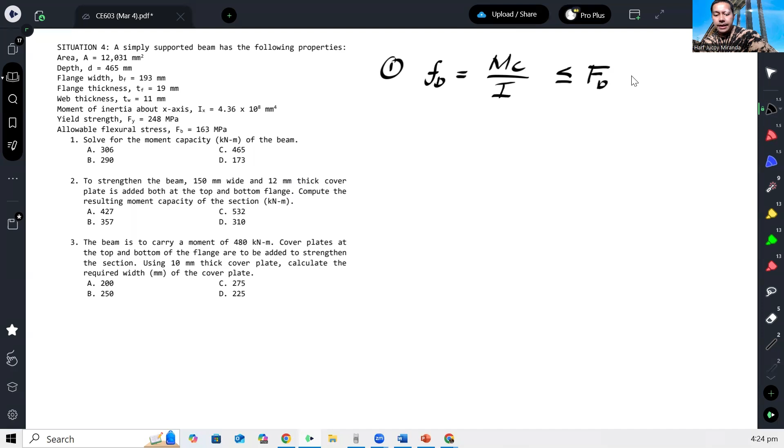Everything is given. So number 1, solve for the moment capacity of the beam - that's all we're looking for. This is easy to solve. The actual bending stress is MC over I, which should not exceed the allowable of 163. So that's what we're solving for - the moment capacity.

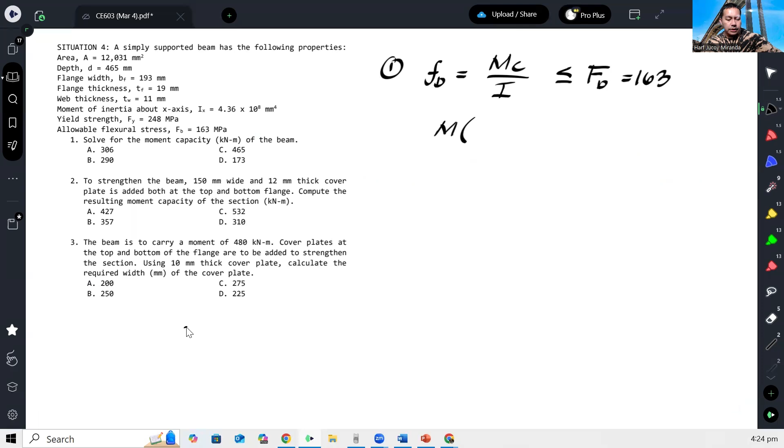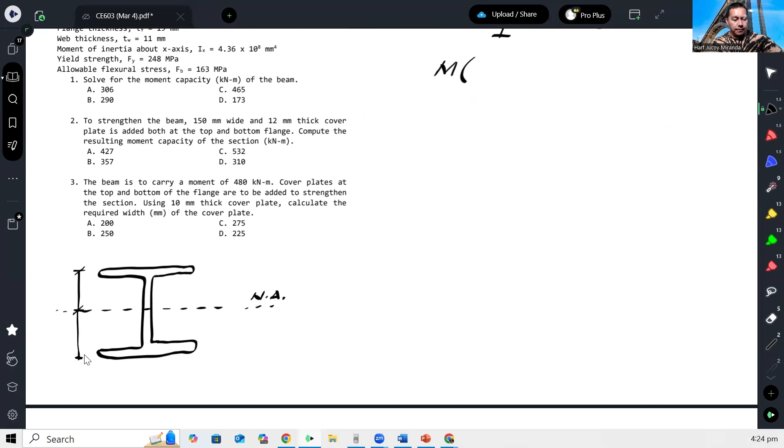So we have M, what is our C? Since this is a wide flange, here's the shape of the wide flange, and the neutral axis is here at X. So that means our C is this, or this at the bottom - which is just half of the overall depth. Our overall depth is 465.

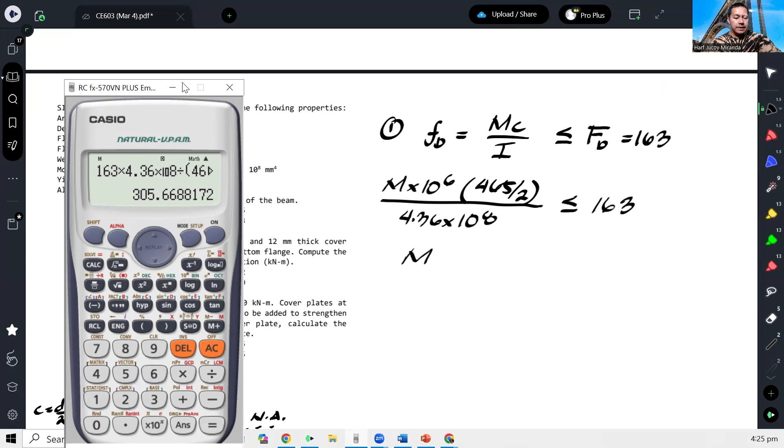So it should not exceed 163, and from that we can get the maximum moment capacity. So we have 163 times 4.36 times 10 to the 8, over 465 divided by 2, times 10 to the 6. That gives us 305.67.

So in the choices, the closest answer would be letter A.

Next, number 2: To strengthen the beam, a 150 mm wide and 12 mm thick cover plate is added both at the top and the bottom flange. Compute the resulting moment capacity of this section.

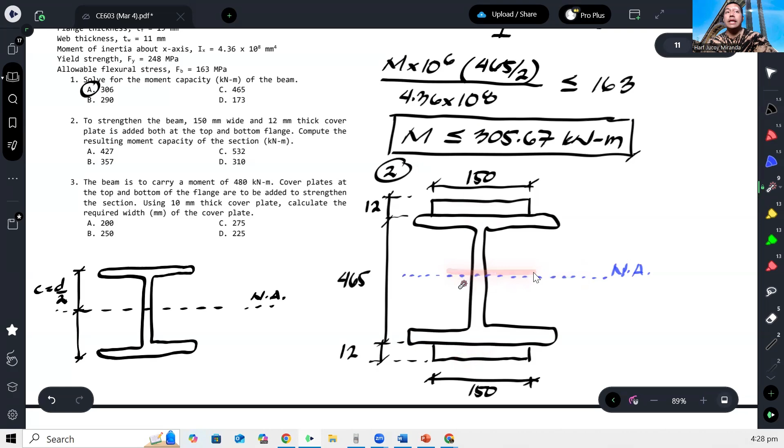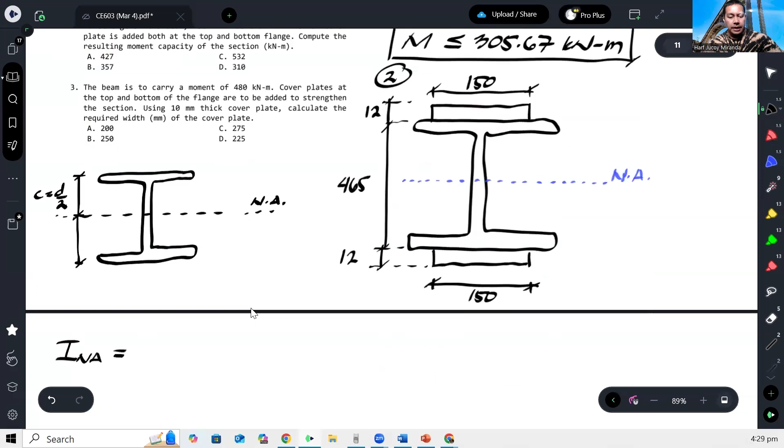So our new moment of inertia for number 2 - let's start with the wide flange. The moment of inertia of the wide flange is 4.36 times 10 to the 8. Since the centroid of the wide flange coincides with the new centroid, we don't need the transfer formula - no plus A d squared.

Next, for the cover plates, since it's a rectangle, we use B H cubed over 12. And since its centroid has a distance from the global centroid, we need to add A d squared or A y squared. So what is that distance? It's 465 over 2 plus 12 over 2.

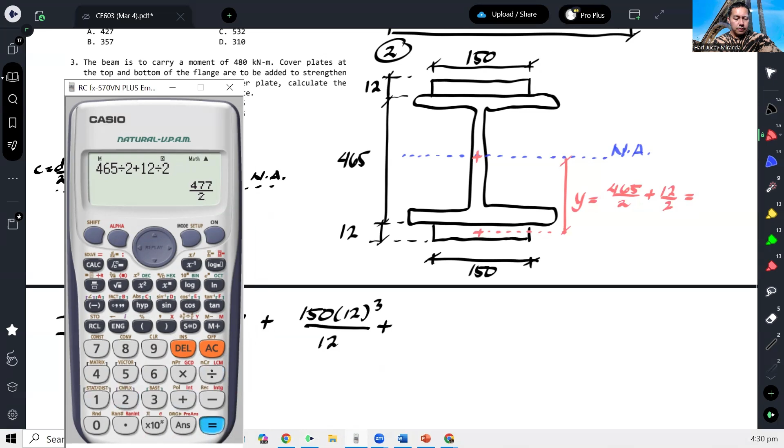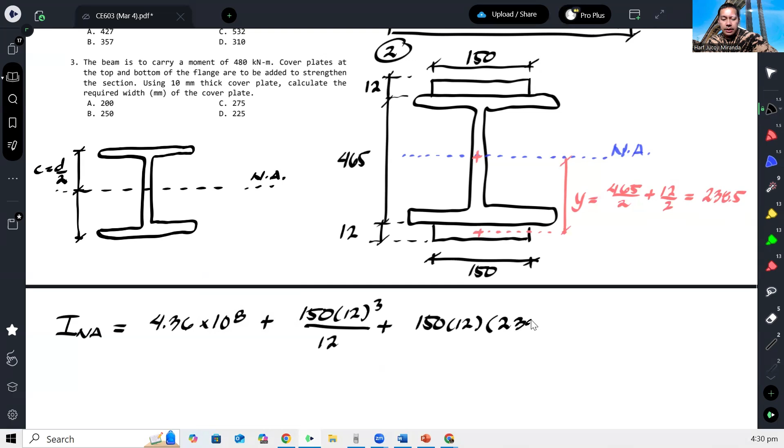And that gives us 238.5. So therefore, the area of the cover plate is 150 by 12 times the distance, 238.5 squared. That is only for the bottom. But take note, you have the bottom and also the top, so we need to multiply this by 2. And that will calculate our new moment of inertia about the neutral axis.

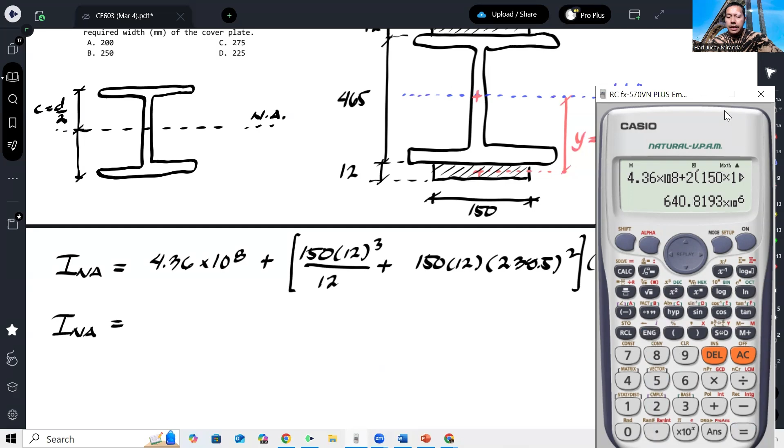So that is 640.819. Okay, so now we can calculate our new moment capacity.

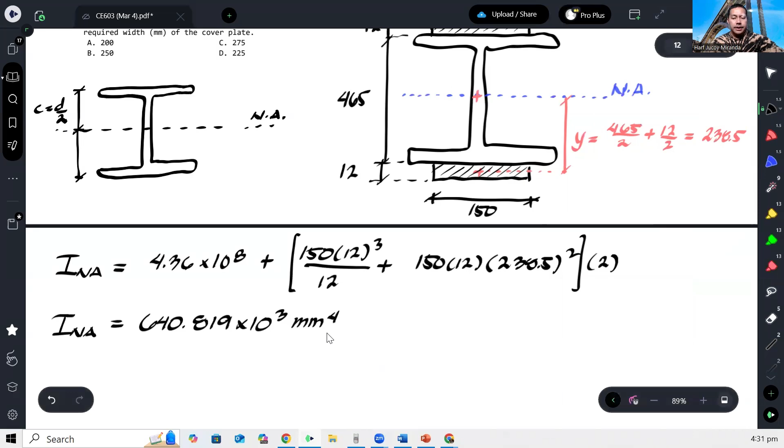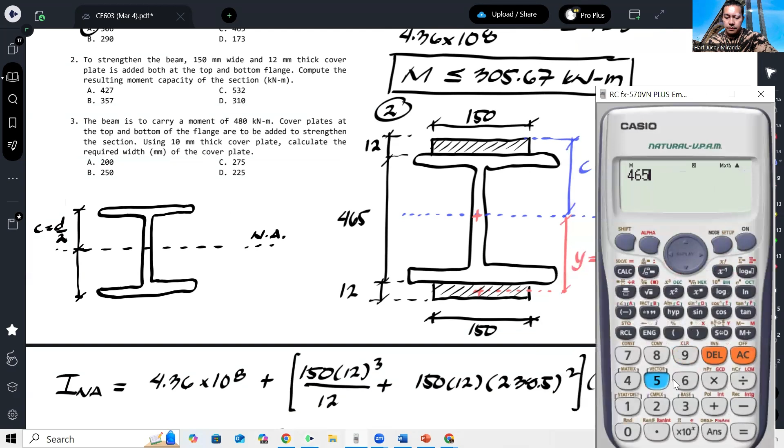Let's repeat number 1. MC over I should be at least, or should not exceed, the allowable of 163. And that gives us M. Our C, here it is, up to the outermost point. And that is 465 over 2 plus 12, giving 244.5.

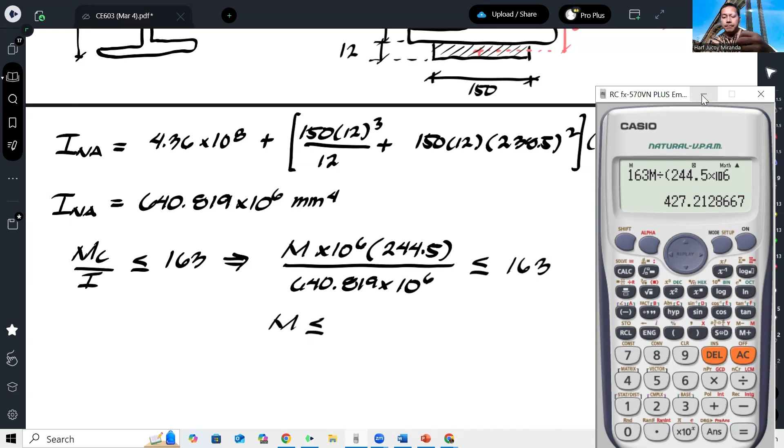This is times 10 to the 6, over I, which we already have. And from there, we can calculate the maximum moment capacity. So that gives us 427.21. So that will be the moment capacity, approximately letter A.

And then number 3: the beam is to carry a moment of 480 kilonewton meter. Cover plates at the top and the bottom of the flange are to be added to strengthen the section. Using a 10 mm thick cover plate, calculate the required width of the cover plate. So now, we're being asked what should be the width, so that it can carry this 480 kilonewton meter.

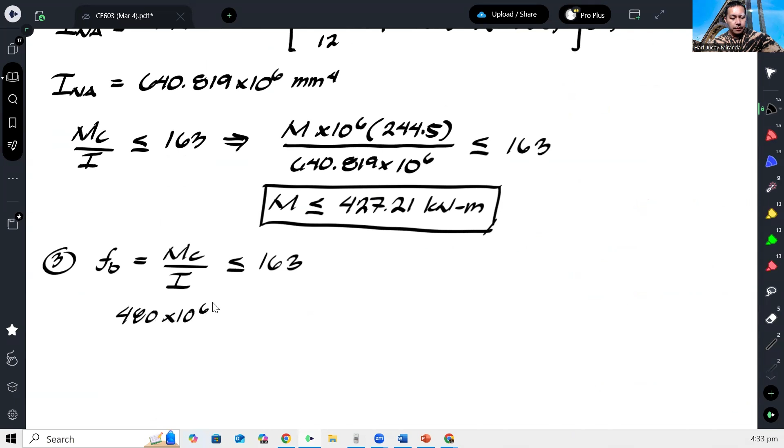So for number 3, this is how it goes: our bending stress, MC over I, we compare again to the allowable of 163. There's a given moment of 480 kilonewton. Then our C, okay, this is how it happens — this is the wide flange. So this is actually similar to number 2, and we have here the cover plate, top and bottom.

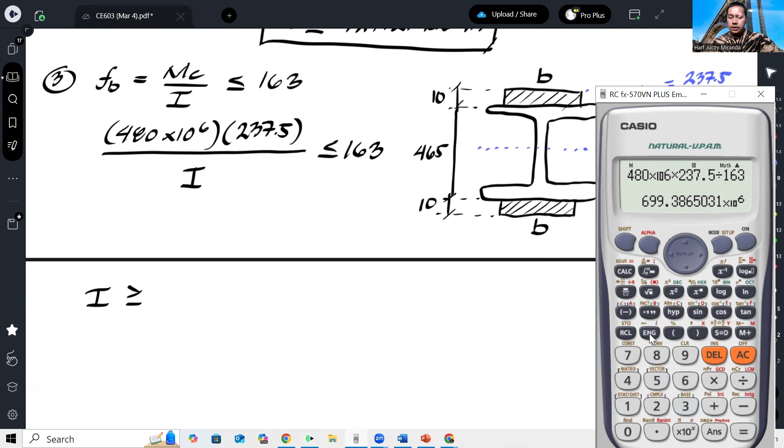It should be at least 699.387 times 10 to the 6 millimeter to the fourth. And how do I compute for that moment of inertia? We can compute for that using what we did earlier — it's basically the same.

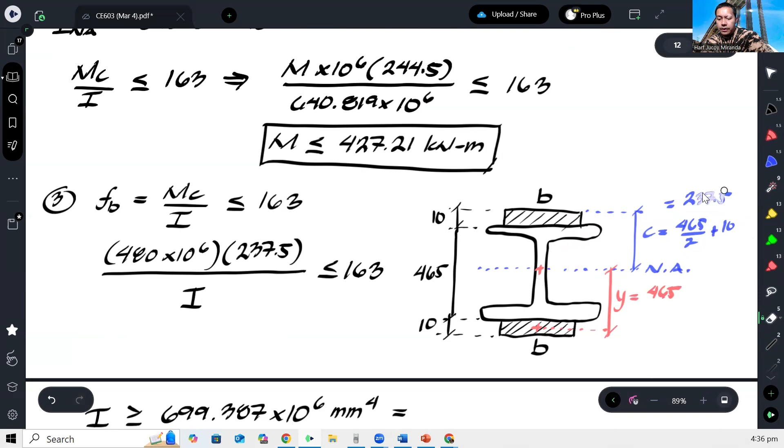So this has an issue here — it should be 242.5. So this will change the value... it should be 714.11.

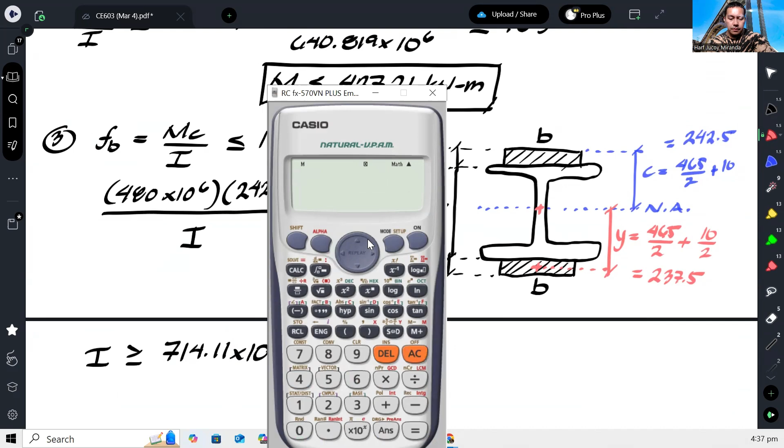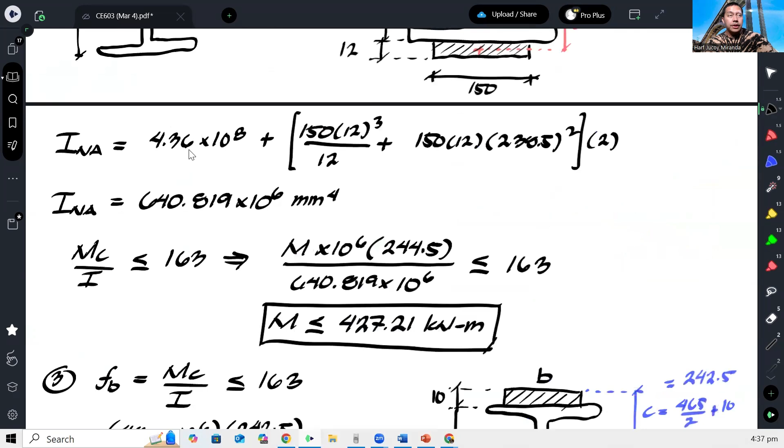So how do we compute this? That is equal to the moment of inertia of the wide flange, which is given in the problem to be 4.36 times 10 to the 8, plus two times B H cubed over 12, plus area 10B times the distance, which would be 237.5 squared. And then all we have to do here is solve for B.

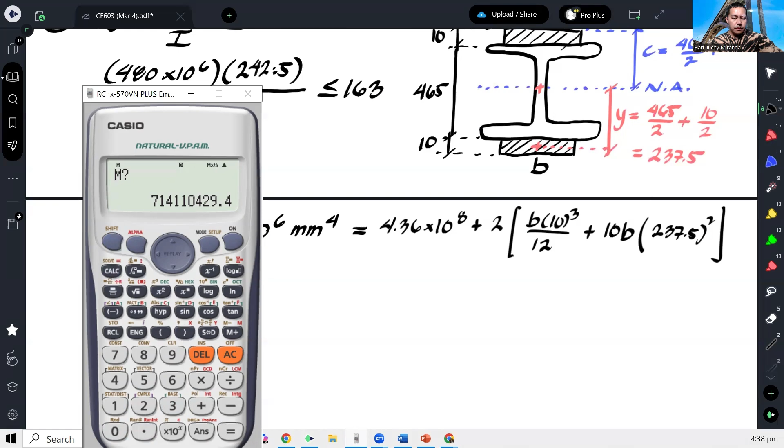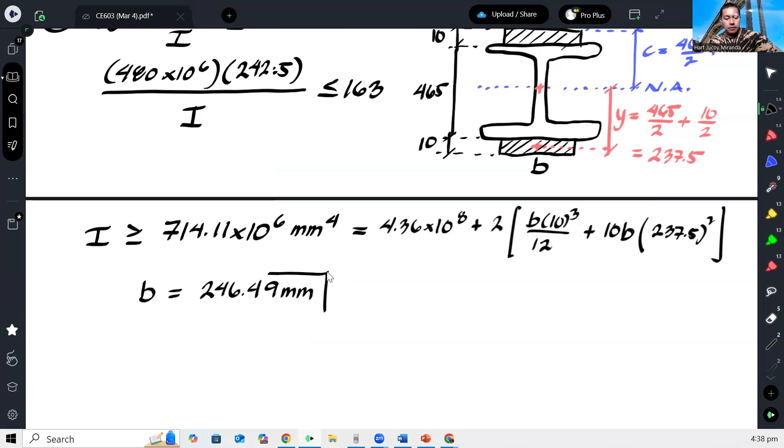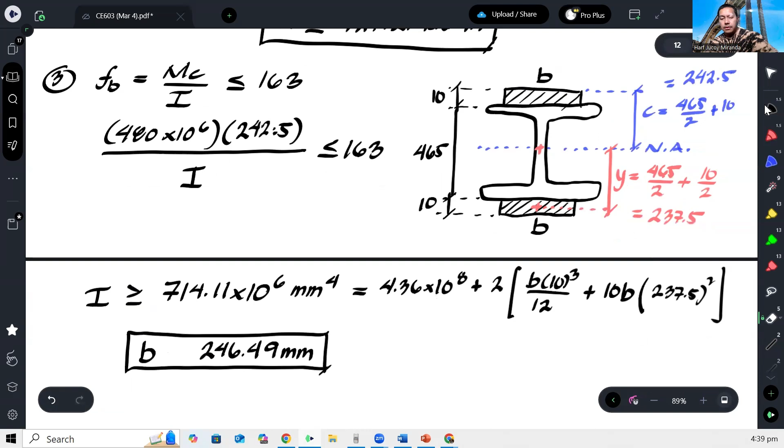And that gives us 246.49. So now, as you can see in the choices, the values are rounded off. So of course, what we'll pick — since this is an inequality, it should be greater than or equal to, or at least, 246 — means our answer here is 250. That's the minimum we got, so we pick the next higher value or next higher size of the cover plate.

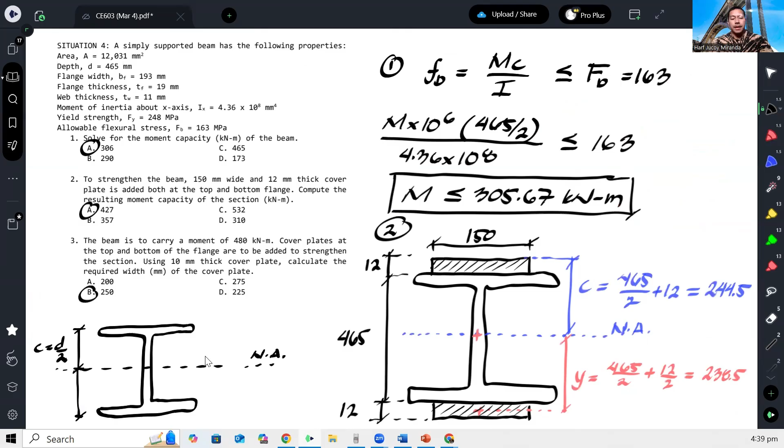All right, and that's how we solve this problem.